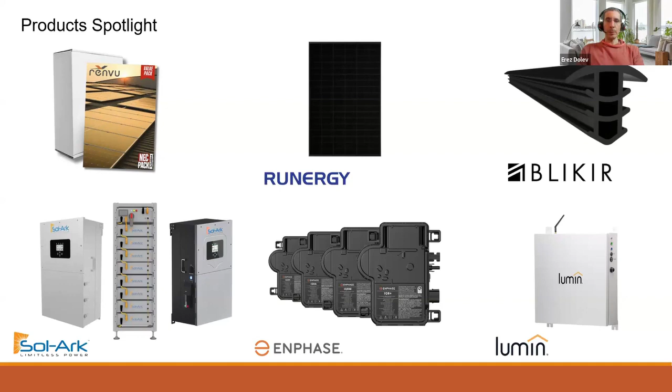We have plenty of Runergy Hyperion modules, 405 watt black, 550 watt, and 575 watt modules, which we're offering at as low as 15 cents at the moment. We have the whole portfolio of Enphase IQ8 series and offering the IQ8H, M, and Plus at discounted pricing. And if you're looking for T-gaskets to make a solar array watertight, Blikir has several options for different module gap sizes.

Here's our bulk module price list for large volume options and our upcoming offerings of solar modules. And we carry Runergy Hyperion, ZNShine, Canadian Solar, Q-Cells, Hyundai, Telsun, Solar for America, REC, and more. We are sharing in the chat a link to this page. We update it regularly, so you can stay up to date with our latest deals and bulk orders.

I'd like to take a minute to also mention the Blikir residential carport. This is a great way to extend existing solar systems or an alternative solution where you cannot install solar on a roof, and when the customer is looking for more added values.

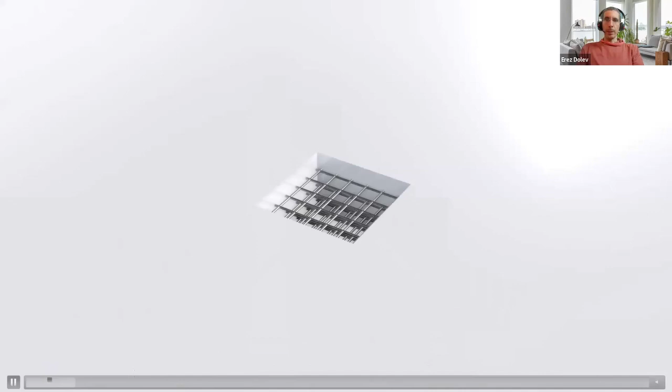I'll start a short version of the installation video here while I'm presenting. The carport is designed to be assembled by a small crew. It doesn't require any specialized or heavy machinery to install.

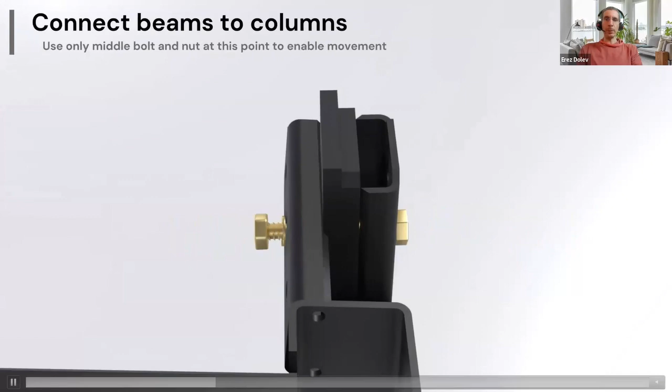This is a solar structure, so it's eligible for the 30% ITC and possibly the extra 10% for US-made products. It is modules and inverters agnostic, and it's designed and fabricated in the US and made from US-sourced galvanized steel, and it comes with 25-year warranty.

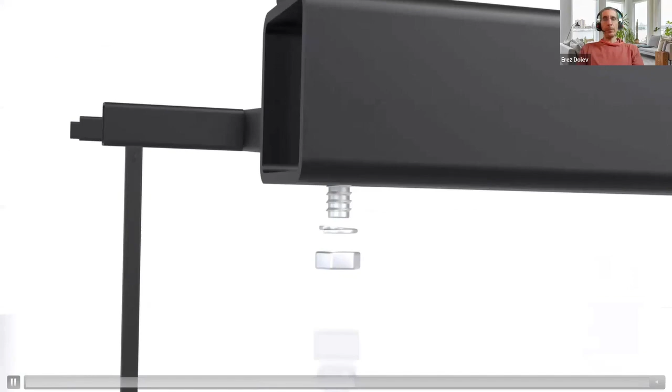The structure comes with a Texas Structural Engineer PE stamp on engineering letter, but if you need your permitting package PE stamped, Illumine-i here have the capabilities of stamping for any state in the US.

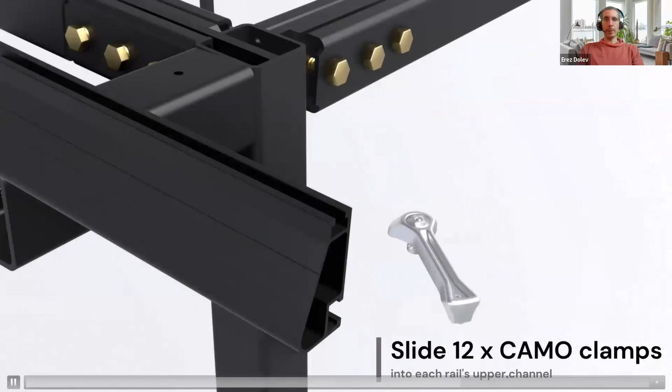You can install up to 24 solar modules with 4 columns of 6 modules. A 2-car carport will generate about 10 kilowatts. You can use residential and commercial modules with it, with load capacities of up to 48 pounds per square foot snow, 215 miles per hour wind load, and seismic design category F.

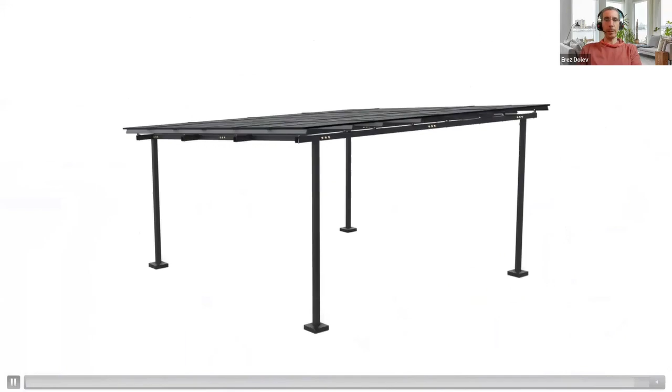Now I will hand it over to Kyle Pease to go over the online quote generating tool to show you how you can generate a quote with a full system in just a few minutes, and we will get started with the webinar from there.

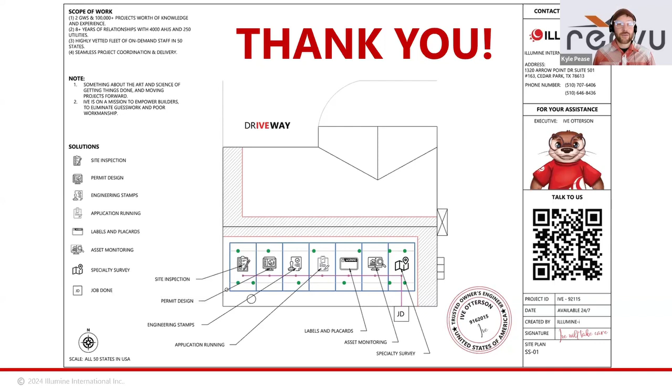And if a revision is required, in my experience, I've seen usually about a 2 business day turnaround time is what we're seeing. I've seen that in the past when a revision is required. It's really quick, a really cost-effective way to get your permitting done.

Got it. I think with the turnaround time, Joshua, you can help us, or you can jump in. Hi, Bharat, is it okay if I take that? Yes, Swati, sure. Okay, yeah. So I'm Swati, and I'm the manager of the customer experience team here at Illumine.

To address the point on turnaround times, I think we've managed to improvise our process even further. We're seeing much quicker turnaround times on revisions. The quick ones, the really small revisions, we're able to get out in a matter of a few hours, with the others being just under 18 hours. That's something we've been able to do with some process enhancements on our side.

Connecting back to what Bharathan said about AHJ requirements and client inputs - the right kind of inputs are valuable to create the right deliverables, but we also have a very robust database where we're proactively reaching out to get updated AHJ information, to minimize the risk of rejections as much as possible. In case of any mismatch or issue, we proactively offer proposed solutions to the client to minimize back and forth. Overall this impacts the project timelines - as long as we get the right site photos and plan details, we should be able to process it even faster. We've made a lot of changes to our internal database to facilitate this as well.